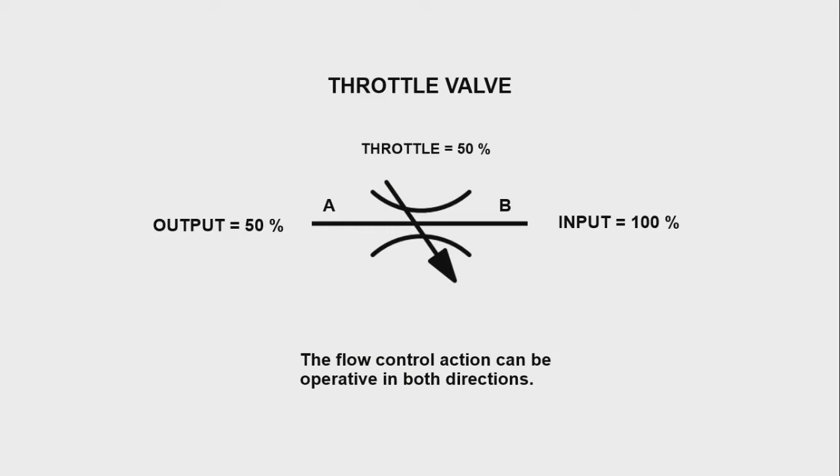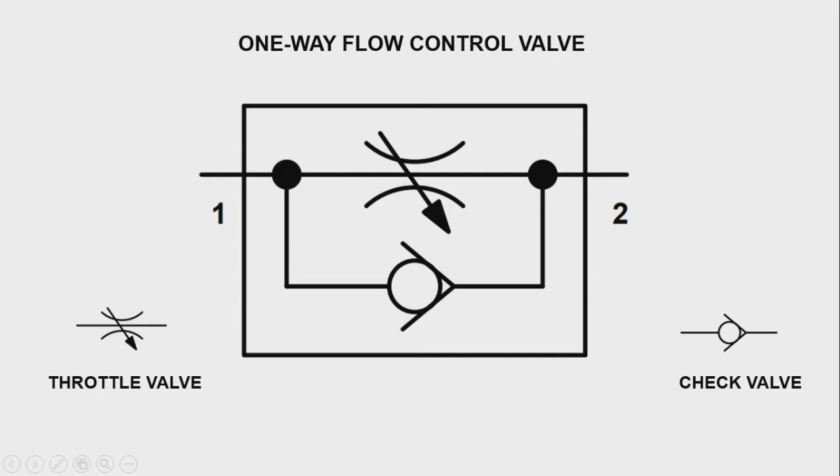A second type of speed regulating valve is a one-way flow control valve. As you can see, a one-way flow control valve is composed of two control elements. We have the throttle valve and a check valve in one construction. Nakaparallel siya. We already discussed about the throttle valve. Now we will discuss unsay function sa check valve. So this is the symbol for check valve.

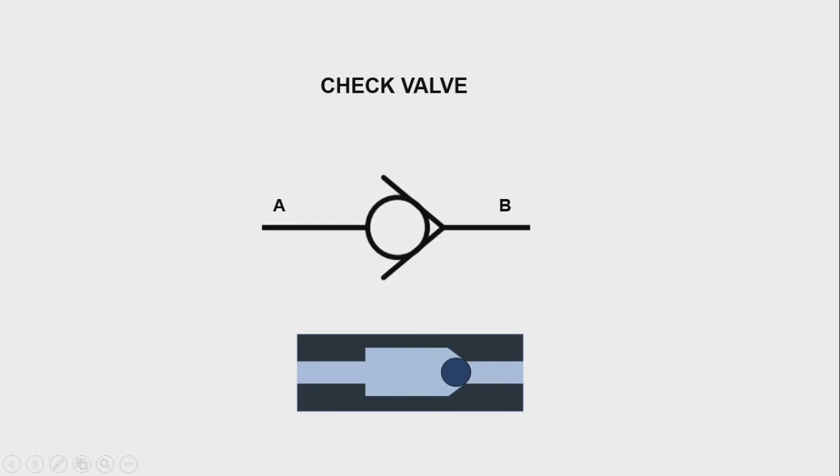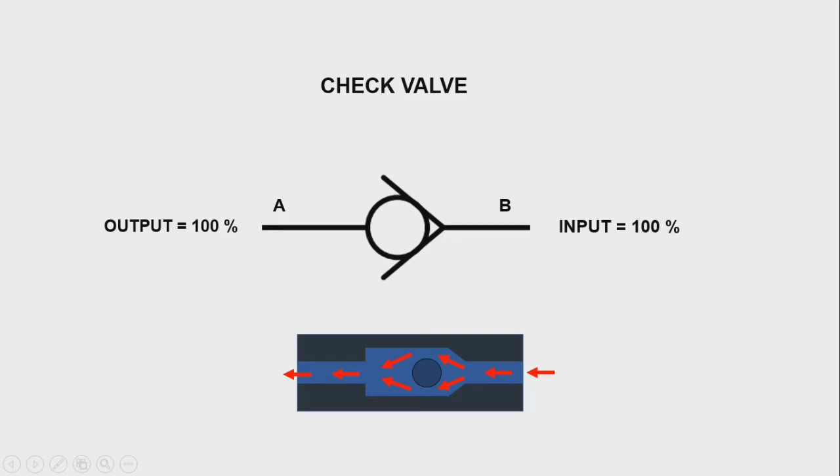It allows the flow of air in one direction and blocks the air in the opposite direction.

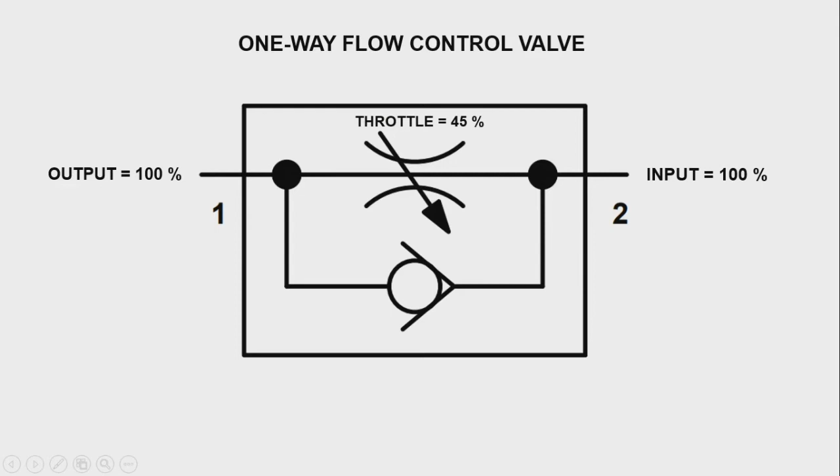Meaning, it allows the free flow in one direction, which is port 2 padong sa port 1, and it controls the flow in the other direction, which is from port 1 to port 2.

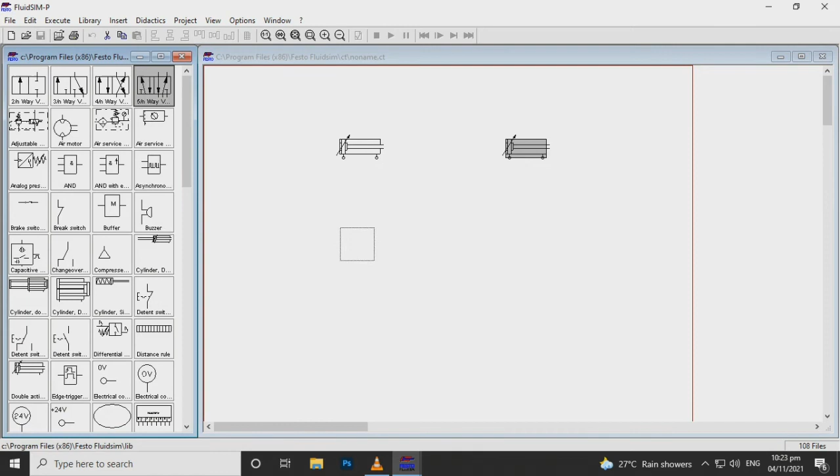Para mas masabtan pa nato, we will try to simulate the circuit using the FluidSIM. We will open a program file, then we will be using a double acting cylinder. Since duha man ka component atong i-try, we will use two double acting cylinders. Since we are using this type of cylinder, we will be using a 5/2-way valve. And of course, we will use the one-way flow control valve and

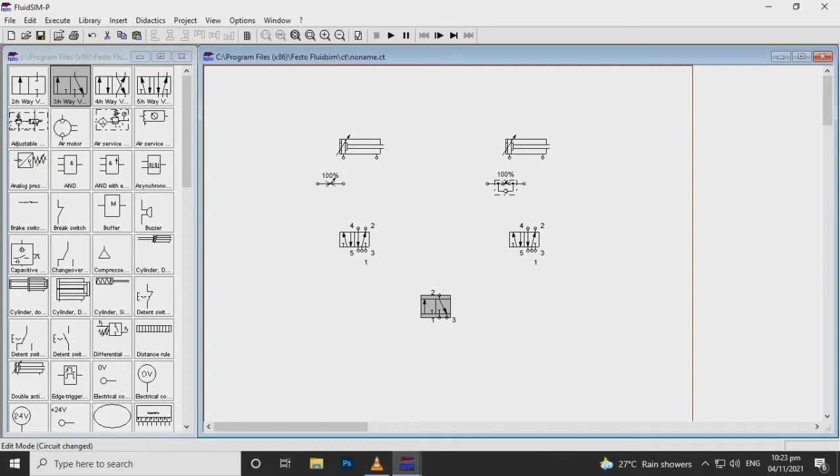the throttle valve. In order to control these cylinders at the same time, we will add a 3/2-way valve. This will serve as our switching para aning 5/2-way valve. Then we will also use the compressed air to supply our circuit. For the type of actuation, we will use a pneumatically actuated valve with a spring return. Same pod sa pikas, we will use a pneumatically actuated and a spring return. Sa atong switching, we will be using a push button and a spring return. So ato siyang i-connect.